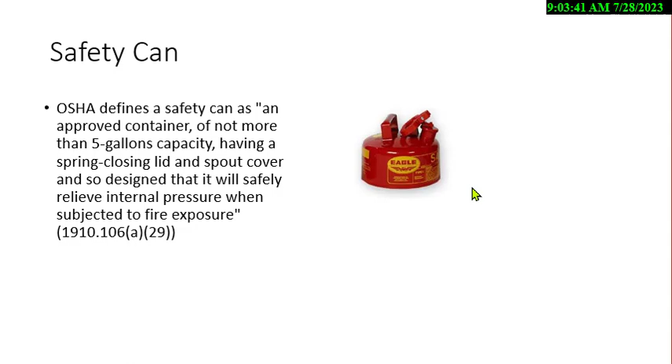It's just going to relieve pressure, and then the can has got a very big spring lid that'll close very safely. The flame arrestors are in a lot of cans, and all it is going to do is take the flames, force it through the tubes, and then the gas comes out, and it's not going to create a fire. And almost all the time you'll see things like funnels with flame arrestors. If you just buy what you use in a store for your car, that won't have a flame arrestor, and that becomes an issue of, it can create a flashback and a fire right through it.

You'll see flame arrestors used in welding cables and other things for oxygen acetylene welding. So flash point is one of the terms they're going to ask. You can start the liquid on fire. It's usually done at room temperature. They use what they call the Pensky closed cup test. You don't need to know that, but they're just trying to ignite the fuel at room temperature.

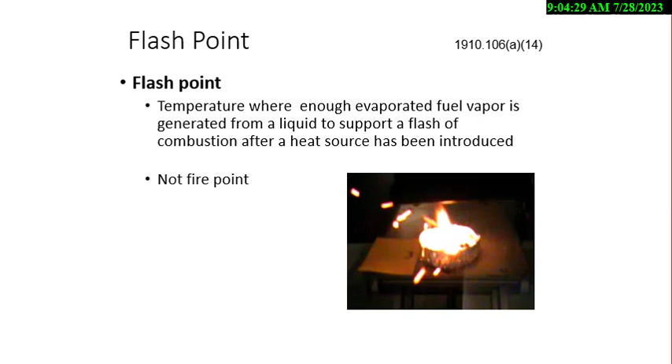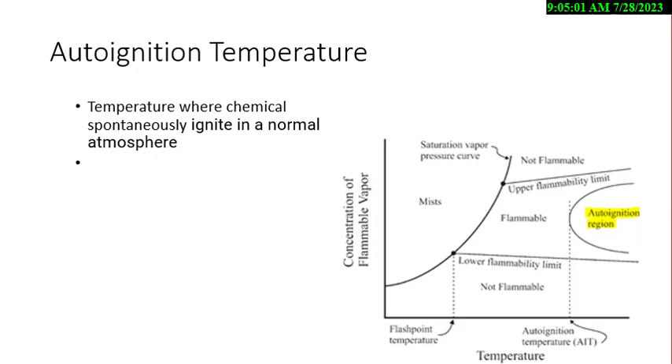The autoignition temperature is where it will actually start on fire based on the temperature alone. Usually you're not going to get your fuels to do that, otherwise they would light on fire at the gas station. Autoignition temperature liquids are usually like the ethers, very much solvents or very much flavorings in the food industry. They'll use ethers because they like them. They dry very fast, but also they are very flammable and can ignite on temperature.

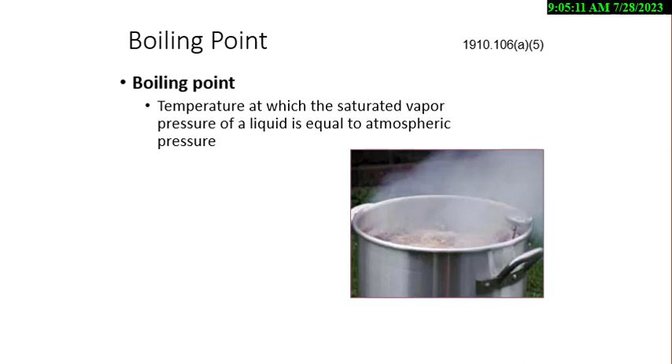The boiling point means, just like you're cooking the water, it goes at 100 degrees Celsius or 212 degrees Fahrenheit. That means it's going to actually boil and evaporate. Now, the lower explosive limit is used in confined space in several parts of the standards. It means that we have enough fuel to start the fire. We have oxygen, we have the fuel, and all we need is that ignition source.

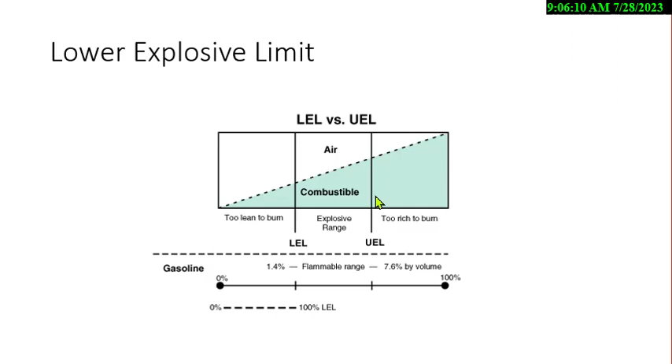The term that's coming up in NFPA is dealing with this GHS, Global Harmonization System issue. When they came up with the pictograms for fire, they dropped off combustible liquid, which was a mistake, because I've had several combustible liquid fires that have hurt people because the container does not say it's combustible liquid. That could be diesel fuel, kerosene, charcoal lighter fluid, and so on. People are spraying it all over the floor. The liquid evaporates into the vapor, the vapor ignites, and then they get caught in a flash fire.

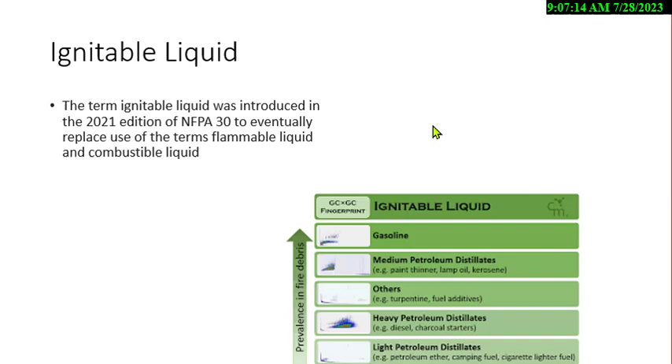So NFPA is trying to get rid of the words flammable and combustible and call it ignitable, and then get the UN GHS committee to put the pictogram on any ignitable liquid. That's been a battle they've been fighting for 12 years, so they're going to say that if you can ignite this liquid, they would want a fire pictogram, and that I think is a good idea. So you may hear that term. It's not on the test yet, but I bring it up because there is a difference between flammable and combustibles. Now the test is still in the NFPA 1A, 1B, 1C for flammable liquids.

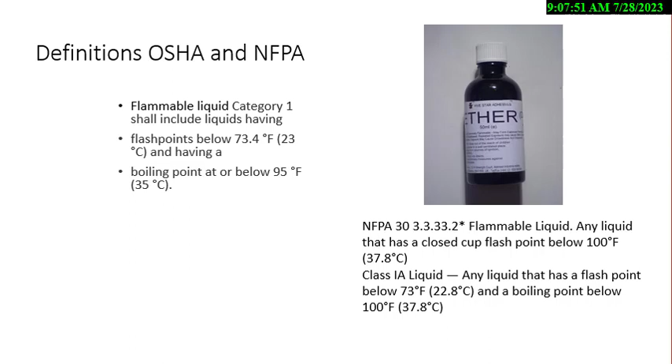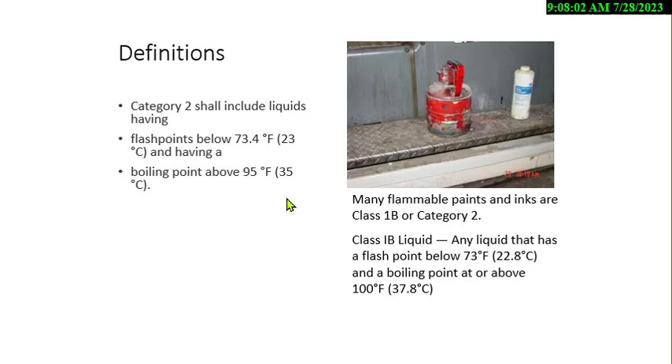It hasn't gone over to the category 1, 2, and 3 from GHS. There are questions that have category 1 flammable, but I haven't seen too many of them. Most of them still seem to talk about the class 1B in all the assessments I've seen. Again, category 1, that's your ethers, low flash point, boiling points below 95 degrees. That's usually used in food for flavorings. Category 2 is your fuels, like your gasolines, your toluenes, xylenes. Almost all your flammable solvents for paint are going to be category 2 liquids. They call them Class 1B in the NFPA.

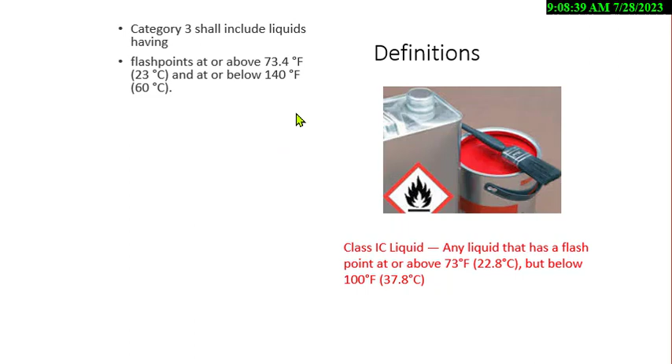Category 3 is a rare chemical. I see it maybe 1% of the time on the chemicals that have a flammable symbol. It's not that common, but it's a flash point over 73 but below 140 degrees. Now, one of the things you'll see is OSHA has different numbers from NFPA. That's one of the problems. OSHA took the 1969 code and made it law. NFPA's changed the numbers, so that becomes an issue of why NFPA wants to go to ignitable instead of just trying to say it's a hazard.

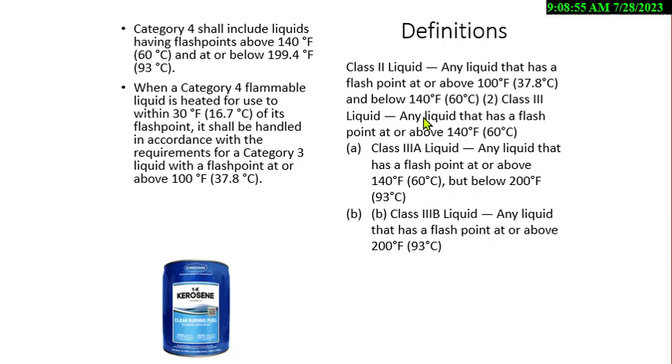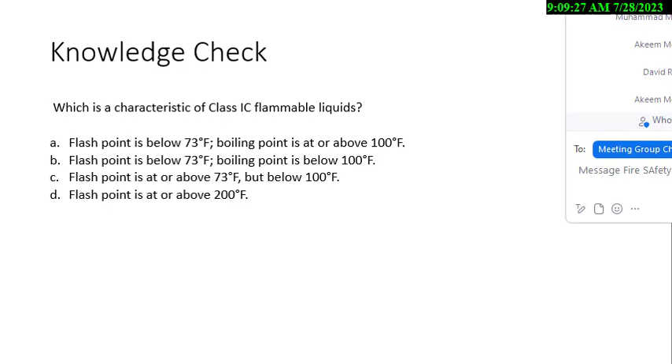Category 4s are your combustible liquids, and again, everybody agrees on that. They've asked this question, what is a combustible liquid, and they'll give you some flash points and boiling points, and that's just an odd question, I think. So this was an exam core type of question. I just changed the answers around. Which is a characteristic of a 1C liquid? Now, this is the problem. I went over it, but I didn't read it word for word. This is what you'll get into, and usually you can narrow it down to 1 or 2. So we'll take a look at it. Type in the chat what you think the answer is, because this one's a tough question.

They're going to ask you a little bit about the alarm systems. There's different ways to notify people in case of a fire. You're going to have an emergency action plan, and that's not in this module, but there's going to be bells, horns, and sirens. My problem lately is these sirens and alarms are 140 decibels. OSHA says you can be 15 minutes at 115. You can imagine what 140 is. It's deafening. I remember hearing one at a place where I had to put the earplugs in because I was going to have ear pain just trying to get out of this building. That's way too loud.

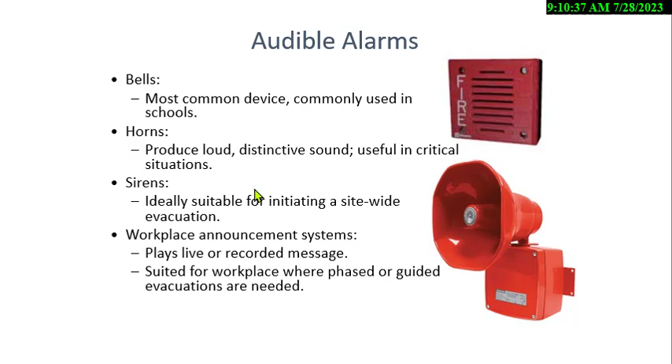Okay, fire extinguishers in egress, you're always going to get questions. Here we're using what we call an ABC fire extinguisher on a flammable liquid. They may ask you about the PASS system. Pull the pin. Where do you aim? This is a question that comes up. It's not on my question.

Where do you aim? At the base of the fire, not the center of the fire. I just had an incident in July with a company where they weren't aiming at the base and they didn't put it out. Aiming at the center, it just went right over the fire into the back of the wall and didn't do anything. You have to aim at the base.

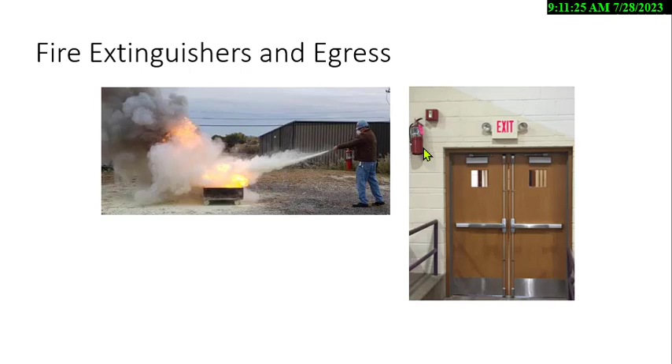Fire extinguishers got to be accessible. So if you put it up where people can't even reach it, or they've got to pull up both arms, that's not a very good idea. They got to be marked and they got to be identified.

So there's always going to be a question on one of the types of fires. A Class A fire I always call the ash fire. It's going to leave an ash. It's going to be cardboard, wood, paper. Pretty simple. Water was used for years, but now the ABC powder is going to be there.

Class B is our boom: our fire is going to explode or it's going to catch on fire. Flammable liquids and compressed gases that are flammable, like acetylene, would be a Class B fire. Class C involves electrical current. So most people think of generators and transformer fires that they see in the media. That's an example of a C fire.

Class D is coming up with a vengeance. What metal is the number one cause of a Class D fire right now in the last year? It used to be magnesium and aluminum, but one is just overwhelming now. Anybody know? Not titanium. Think electric vehicles. Lithium. Very good, John. Lithium fires. Lithium fires cannot be put out with an ABC fire extinguisher.

If you take a Class D fire extinguisher, which costs like $500, it's expensive. It's essentially a graphite and salt mixture. Graphite is a carbon powder. You spray this, you're going to have black dust everywhere, and it's got salt to help kind of char it.

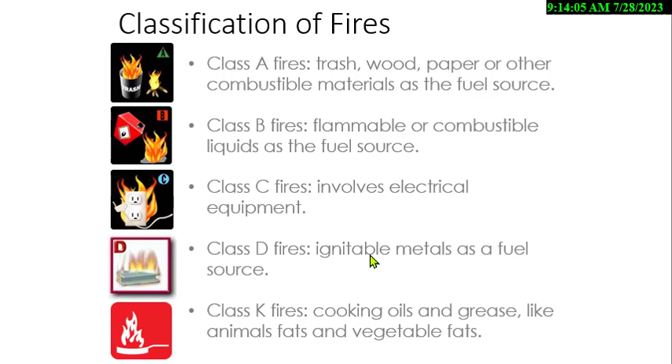My experiment I hope to do, actually next week, is to try to get one of these lithium batteries, light it on fire, and just put a bag of salt on it and see what it does, because I haven't seen anybody do that.

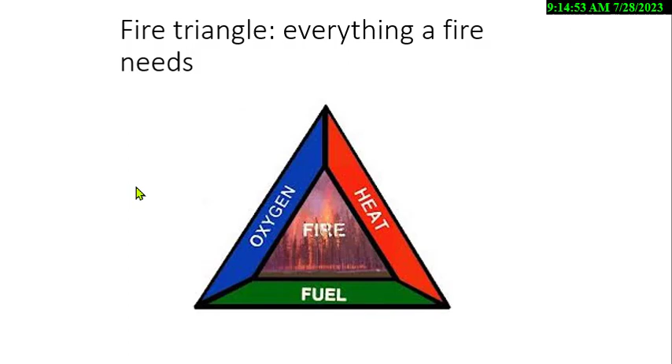But the fire triangle is what we started with 100 years ago. You had to have oxygen, heat, and fuel. If you don't have one of those three legs, you don't have the fire in an area. You'll get a version of this in questions all the time. Lately, the fire tetrahedron's been coming up, and I was surprised. You got to remember, the fire questions are probably 200 to 300 in the bank, and you're going to get so many of them, and some of them come up more frequently than others.

But it's the chain reaction. If you ever had a halon system, which was very popular in the 70s and the early 80s to put out computer electrical fires, the halon would interfere with the chain reaction of combustion and stop it.

It would be about 7% halon in air, which means you could breathe it. I've been in halon environments where the extinguisher discharged or the suppression system discharged, and it feels very much like an ozone, kind of an irritating chlorofluorohydrocarbon taste to it, but not lethal, not exactly the best for you. But because of the environmental issues, it became pushed to the side, and you don't see it too much.

So there's always distance questions. For your combustible metals and water, you got 75 feet to get to them. I've actually seen the question where they ask that if your flammable liquids are going to be B and C, then it's going to be 50 feet.

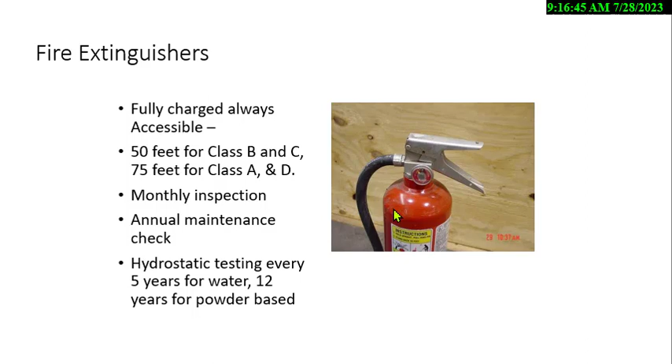Generally, you're going to make sure the hydrostatic testing, everything is good, there's no rust, no corrosion. I flip up the extinguisher. So I'm just going to stop the screen real quick. I just take the extinguisher like this, and I could feel the powder. And one of the things I notice when I do this one, the powder comes as if it was a rock. I can feel that the powder moved as a chunk.

So what that's telling me is that extinguisher has probably got a cake of that yellow powder. It's not evenly distributed like sugar or anything else. It may come out and just the propellant and some of the powder come out, but a lot of that extinguishing agent is now in a big solid ball, and it's not good. So we're going to have to replace that. That's a typical monthly or annual inspection that you would do. Remember, monthly is a visual, annual, you're going to pick it up and look at it.

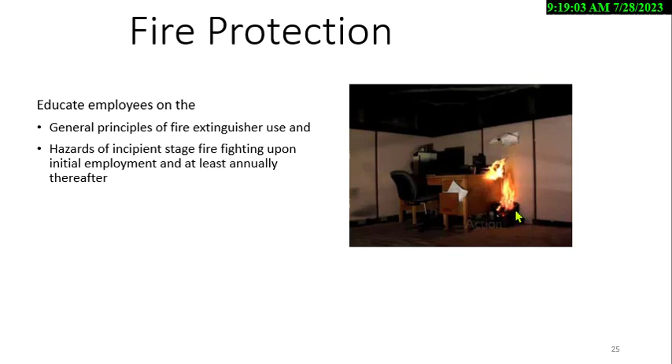You have to educate employees on different types of fires and the stages of it. They're going to use the word incipient. I always call that the garbage can fire. It's a very small fire, smaller than you are, and it can be put out with 1 fire extinguisher. And that's what I call incipient. When it's over your head, you always have to plan for an escape route when fighting a fire, because the last thing you want to do is be trapped between the fire and the exit.

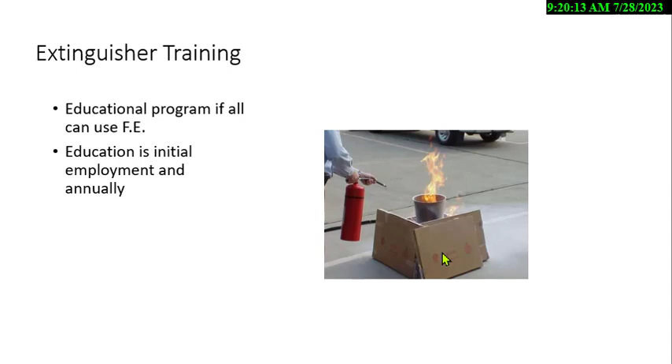Okay. So everybody who's going to use a fire extinguisher should have an educational program. Everybody should have initial training on what to do in case of emergency, and then every year afterwards. That's one of the few requirements in OSHA. I would never do this as a trainer of fire extinguishers. This is dangerous. You light gasoline on top of a milk crate, and you're going to put it out and practice it. You can imagine what could go wrong: if this milk crate melts, the fire can go right toward that vehicle, and next thing you know, you've got a very expensive vehicle to replace.

So I always tell people, I just practice. We want to get to the base of the fire. We just put an X. I want to be able to see the X being obscured by the fire. Again, when you do this training, this powder is kind of like a silica in a way, and you have to plan for that to be on everything that might be in the area. So you want to do it outside. And I always do hands-on training, because once you do it, you'll never forget it.

It's one of those things that people, once they get used to it, even if they shoot high because they're not used to ever using it — 95% of people I train have never used one in their life — if they go up there and aim at the green sign, they'll very quickly figure out how to move it down within a half a second or a second. And these things will usually shoot 17 seconds on a small one, so most people can do it.

And I've had several students actually put out a fire in the facility. Believe it or not, one of them saved the facility, because the fire was 8 foot, and I thought, well, that's a little bit beyond incipient, but he started at the base of the fire and it went out fairly fast. Remember, because it's tall doesn't mean there's anything burning, it's just a flame. So he put out the base, and that saved the plant, and that was good.

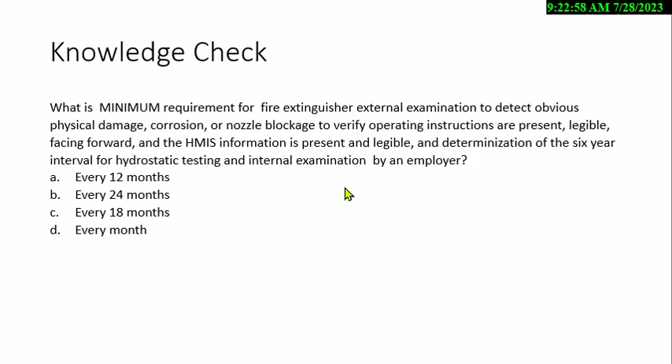Very good. It is 12 months. This comes from NFPA 10. NFPA 10 is the portable fire extinguisher standard, and they define what is an annual inspection. So this is like word for word out of NFPA 10, and you'll get a version of that. But it's a detailed inspection. In OSHA, it says you got to do an annual inspection. It doesn't really talk about how detailed it would be, and NFPA 10 does.

Every 12 months. So the fire detection systems have come up on the ASP. For those that are going to take that, that's been an issue. You won't usually see it on a CSP or CHST test. But the distinguishing area has been, what are the types of detectors? And we'll talk about that. There are 4 different types.

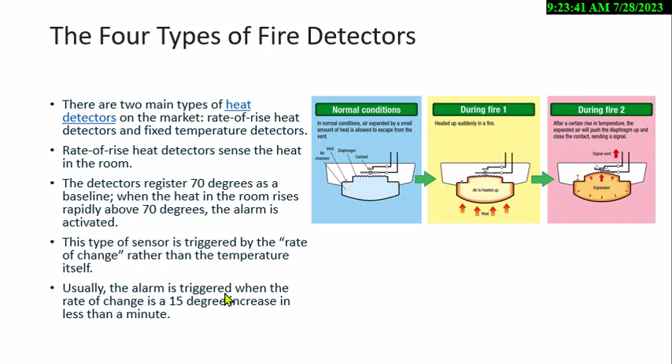There's rate of rise. That means it's sensing the rate of the heat coming into the building, and as the temperature rises, it's going to detect and then send the alarm. At 70 degrees Fahrenheit, if it goes up a 15-degree increase in less than a minute, that's a rate of rise. Okay. The heat detectors are bimetallic strips. As the temperature goes up, one metal starts to bend and curve, which then triggers the alarm and focuses on the actual heat. A lot of them are 135 degrees.

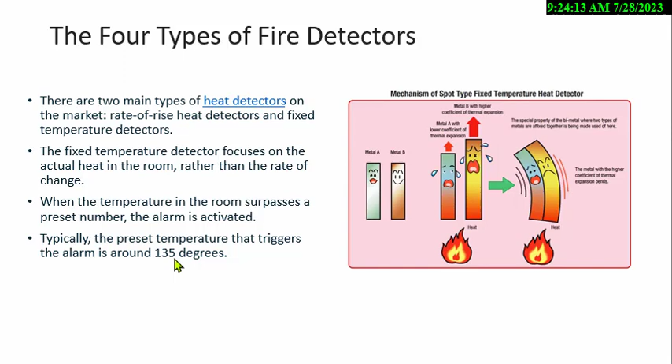People think, well, wait a minute. That seems very low. Well, you could buy ones that are higher, but your room shouldn't be 135. You can't work in an office at 135. You're going to be dying. You can be outside and it could be 135, but that's a different issue.

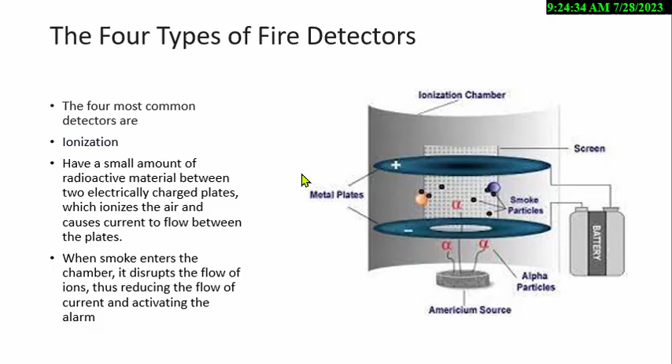So there's photoelectric. The photoelectric shoots a beam. The smoke obscures the beam, sets the alarm. Pretty simple. Ionization. It's got 2 metal plates that are charged. The smoke interferes with the charged plates, which ionize the air, and that causes the flow to be disrupted, and that sends the alarm.

Which one detects a difference in the light level from the light source? This is an actual ASP type of question. Very good. C is the answer. Photoelectric detector. Like I said, that's an odd question, and this was an old question. I've been doing this for 20 years. Back then, it was a very common question. Then it kind of disappeared about 5, 7, 10 years ago, and now it seems to be coming back. More students are talking about it. Yes, go ahead.

Yeah, John, in a few of the questions which you have posted on the group, sometimes they ask if there is a warehouse or some kind of installation, which type of detectors are best to install? So how to tackle those kinds of questions?

Well, in a warehouse, you're going to be in a large area. So smoke will go up. You hopefully would put it above the packages. Whether you use rate of rise or photoelectric, I would say photoelectric would pick the smoke up faster. With rate of rise, because you may have a 60-foot-high area, it could take a while before a 15-degree difference comes up. So there's no magic formula, but I would go with photoelectric because it would pick up smoke faster. There should be no smoke in the warehouse.

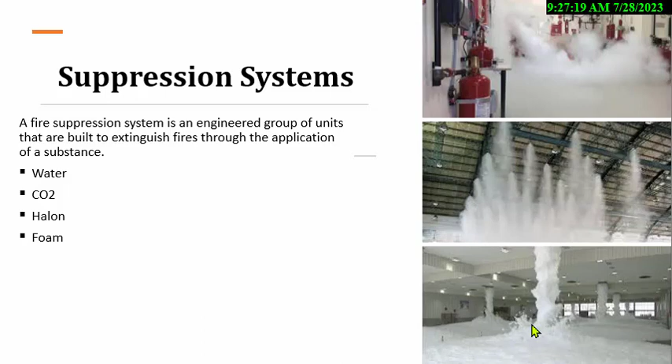The 4 types of sprinkler systems. The ASP will ask you this. You won't have to know it for the other ones. Everybody has to know how far the material has to be stored from the sprinkler. How many inches is required to be cleared on every sprinkler if you're going to put storage below it? Anybody know that number? How many inches below the sprinkler can you put your rack storage? Okay, we'll talk about it.

Let's go into the wet type systems. Wet type is the most common one you'll see in almost all your buildings you go into. It's filled with water. There's a fusible link or a little glass liquid bulb in it sometimes. If it melts at a certain temperature, and you can set it for 135, 150, there's all these different ones that'll burn at different temperatures, then it floods that sprinkler. If that's the only area where the fire is at, that's the only sprinkler head that's going to go off.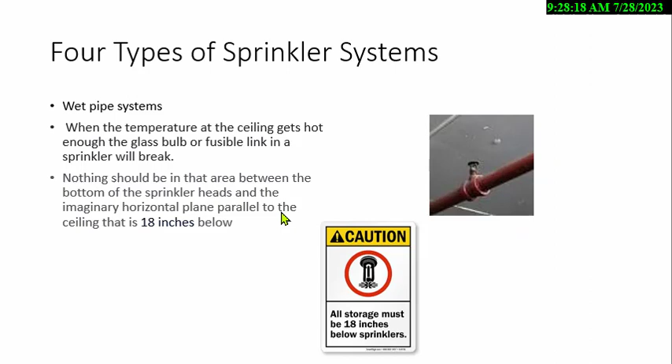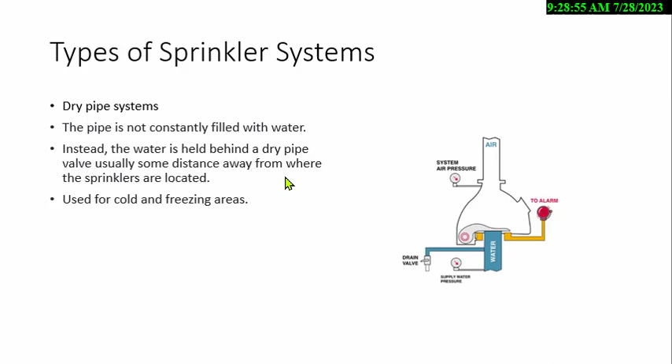The dry pipe is always used in a cold warehouse, because if you put freezer storage, that sprinkler pipe will be frozen solid if it's got water. So the dry pipe system is going to have air or nitrogen in that pipe for that cold area, and then when the alarm activates, it's going to release the water. So they'll always ask you what type of system would you want to use in a freezing refrigerated warehouse at 20 degrees Fahrenheit or minus 10 Celsius. It would be the dry pipe.

Pre-action means we have to do 2 things. This is going to be used a lot of times in museums and computer rooms where the product is very valuable. So you can imagine, I'm going to be at the Facebook data center today. You're talking $200 million of electronic computers. You cannot put a water system in and blow that whole system out. So they're going to put it in an area where the sensor is going to pick up there's a fire, there's going to be a visual confirmation possibly, and then it's going to activate that head. That's why it's called pre-action. It's not going to activate on its own.

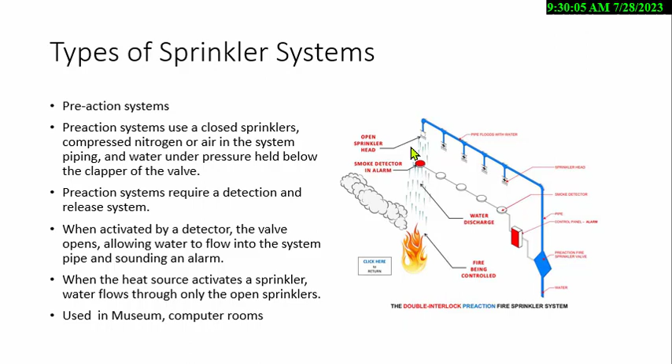It's going to have a system where the alarm's going to go off. You can even have them in some of these buildings where it's going to make a horrific alarm for the person at the station and the area until they deal with it. They can acknowledge it, but it's going to ask kind of permission. You can have it activate on the detectors, but the idea is it's going to have a detector, it sends the signal, and it activates. And whether you get involved or not would be in there.

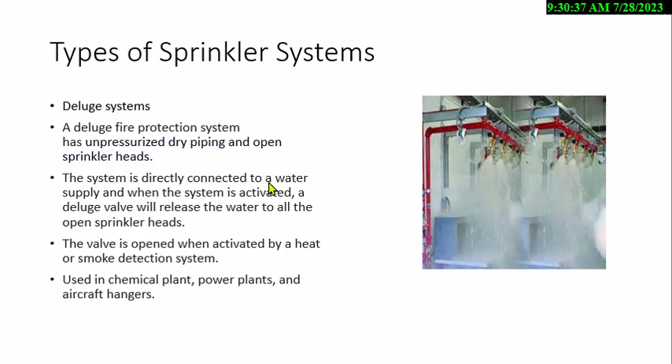Deluge systems, very much going to be in the chemical plants, power plants, and aircraft. Usually a foam system. Every head is going to open at once. It's going to flood that area. Used in combustible dusts, like in some of these areas where there might be coal dust, where they just want to flood the area. They don't want to have one sprinkler head open at a time. They're just going to flood it out because the system wants to try to minimize a possible explosion.

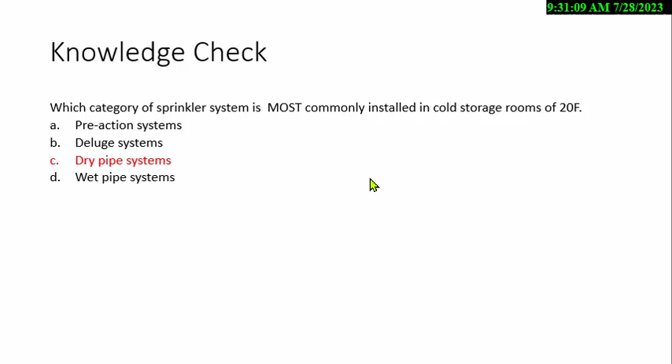Okay, which system is mostly installed in the cold warehouses? What do you think? C. Okay, very good. Oh, false actuation is always an issue. And like I said, these data centers, these computer servers that are out there, each one's $1 million, and you got 200 of these things. It's not like you want to get this thing wet.

Any questions on the material? Exactly 30 minutes on the fire side. Those are the most common ones that we're going to see.